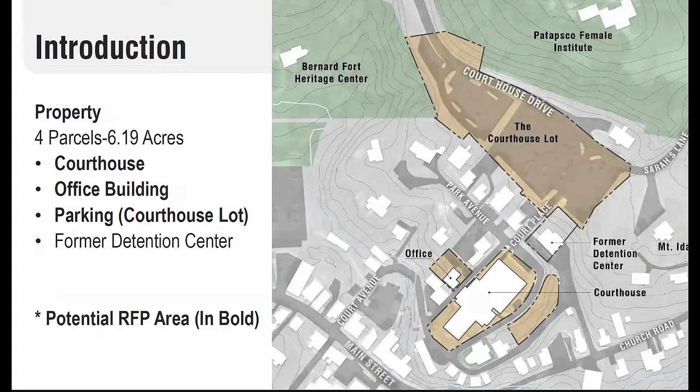The county goals and intent: redevelop the courthouse campus. The redevelopment should complement and enhance, but not compete with, existing businesses on Main Street. This is very important, not to create competition but rather support Main Street. Any redevelopment and reuse will be historically appropriate and follow the Ellicott City Historic District guidelines. Reuse of the property should, whenever possible, emphasize clear visual and physical connections to Main Street and increase foot traffic to the historic district.

The reuse should be sensitive to adjacent properties. At least some portion of the courthouse campus should be dedicated to community use if possible, and every effort should be made to leave adequate parking available for public use as part of the campus. Lastly, creative environmental site design practices should be utilized whenever possible, such as green roofs, green walls, and solar panels.

The schedule for this effort: as Zach mentioned, there was a request for information, RFI process, that occurred during March and April, and a planning board process that went from March into June. As part of that, there has been community input that brings us today, the public meeting on July 20th. We'll have an online survey in addition to the polling on this question, and that'll be open for two weeks. We'll talk a little more about that at the end of this meeting. September 1st is the zoning board hearing, and should this move forward to a request for proposals, or RFP process, that would occur in the winter of 2021 and 2022.

The courthouse building itself is comprised of four principal structures with multiple floor levels. Over the years, these buildings served many municipal functions, and there have been multiple renovations. You see here the 1843 original courthouse, the 1938 addition. They were then attached to the 1842 Oak Lawn residence that became part of the county courthouse. Then in 1988 was the latest addition. That 1988 addition reoriented the courthouse building so that the main entry is now to the parking lot side rather than at the original courthouse toward Main Street.

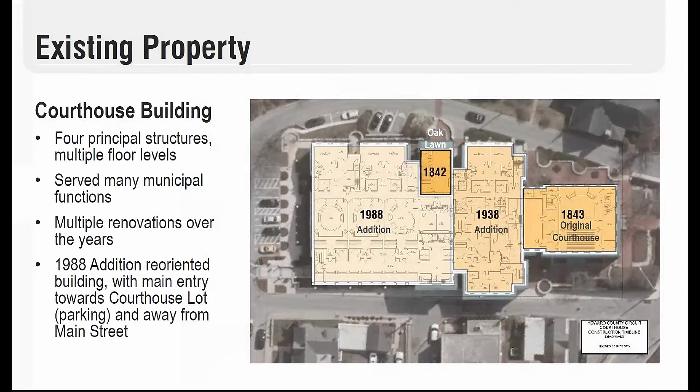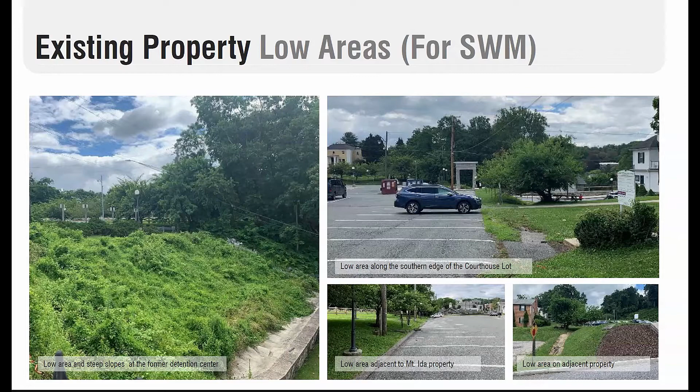View sheds, of course, include the views immediately from the courthouse building. We showed photographs from Park Avenue and from the front courtyard spaces looking out towards Main Street. We want to be sensitive to the Patapsco Female Institute, the views from the hillside up there, and also views as one approaches Mount Ida along Courthouse Drive. The views from the parking lot are dashed in because right now you're not up high enough to really enjoy them, but whatever happens with that parking lot may be able to take advantage of some of those broader views.

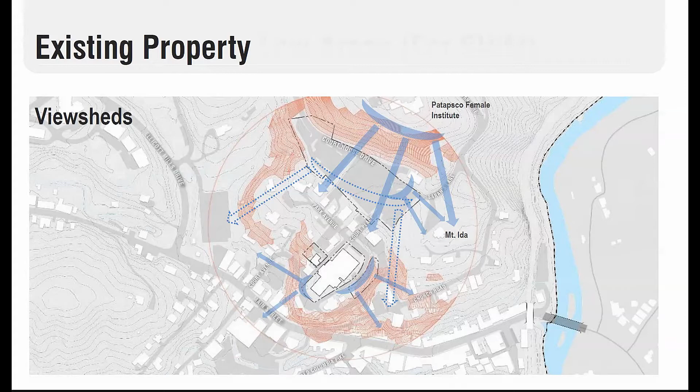From our work on the master plan, looking at the site from a planning perspective, we know there are some challenges. Adaptive reuse of the courthouse building is a challenge - it was designed solely as a courthouse, with a large floorplate, interior bearing walls, and limited exterior windows, which creates challenges with what uses you put in the building.

The topography between the property and Main Street presents access issues - vehicular and ADA accessible options to the courthouse are limited. Economic feasibility without an element of new construction is a challenge, which is something we heard from the RFI process Zach referenced earlier. And there's the public parking component in context of the broader Ellicott City parking resources and management - we can't look at this parking in a vacuum, it needs to be looked at holistically with all of Ellicott City.

We want to talk about the relevancy of the Ellicott City Watershed Master Plan. For those familiar with the process, in addition to geographic frameworks that talked about things like the courthouse specifically, we also had topic area frameworks dealing with community character and placemaking, flood mitigation, environmental stewardship, economic development, and transportation and parking. All of these frameworks interface with this courthouse reuse.

In addition to the overall topic-related frameworks, there are geographic frameworks, and the courthouse area is one of seven geographic frameworks. This shape encompasses more than just the courthouse property, because whatever happens there needs to take into consideration adjacencies like the Patapsco Female Institute, Mount Ida, and so forth.

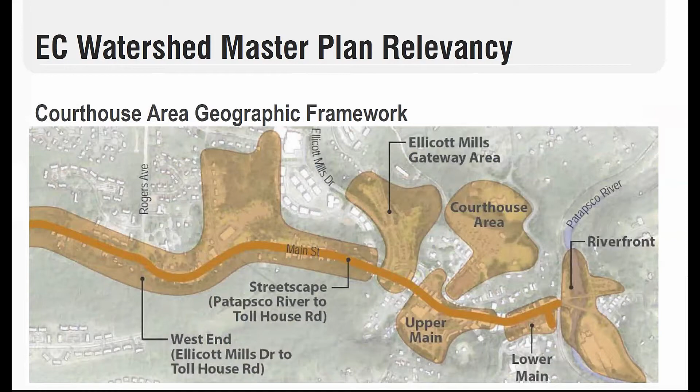A big recommendation of the Watershed Master Plan was the Green Cultural Trail, an opportunity to create a multi-tiered pedestrian experience throughout Ellicott City. In red, along the roadways and Main Street, is a more urban experience engaging with storefronts and active uses. In the green areas, a series of trails and pathways—some rustic footpaths through steep slopes and woods, others paved sidewalks and trails—linking heritage, cultural, and natural resources throughout the community. There's an opportunity to create a loop connecting the courthouse with the Bernard Fort Heritage Center, the Patapsco Female Institute, and Main Street.

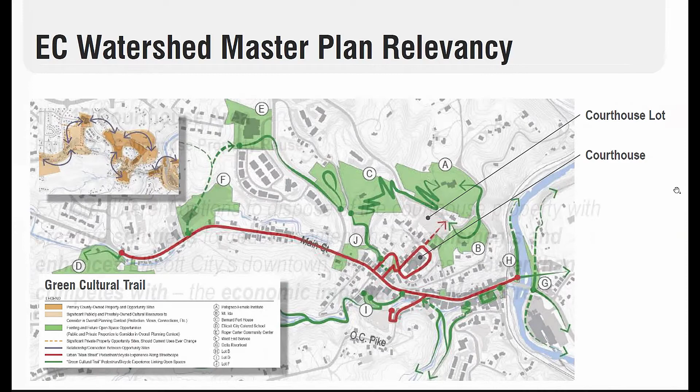In the master plan, where we specifically discuss the courthouse area, the policy recommendation is to explore different options to dispose of the property with creative solutions for redevelopment that complement and enhance Ellicott City's downtown, reinforcing rather than competing with the economic importance of Main Street. This repeats the county's goals for this effort.

Specific implementing actions are highlighted here. I won't read through all of these, but they include dealing with a sensitive interface to adjacent properties, a holistic master plan approach, creating an open space network connecting with other open spaces, view sheds, environmental site design, public art and interpretation, and looking at a brand identity for this area—does Courthouse Hill become a distinct area within Ellicott City with its own identity?

This presentation will be posted online after this meeting, so if you'd like a chance to look at these in more detail, you'll have that opportunity.

In the master plan, we also included framework plans addressing some issues, which we'll talk more about this evening—potential relationships, areas where stormwater makes the most sense, highlighted by the number H, critical street connections marked A, view sheds, and relationship to Mount Ida. Off to the right are examples of where stormwater might be incorporated into the parking lot, and how new construction on the site could be developed to either serve as a focal point or facilitate connections between the courthouse and the Patapsco Female Institute.

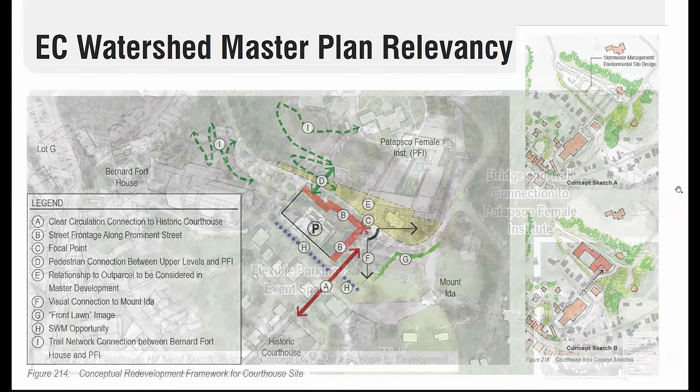The master plan included illustrations. I want to emphasize, as we did in the master plan, these are illustrative, showing conceptual ideas, but not prescribed recommendations for the site itself. This was just showing some potential for the site to use in the process for spurring interest in courthouse reuse.

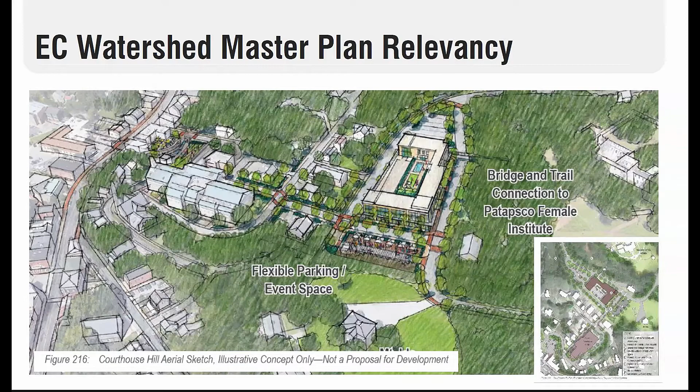So now we're going to get to some specific reuse opportunities for the site itself. We're really here tonight to hear from you in the polling and Q&A to get your input on this as well.

First, we're going to talk a little bit about the former detention center because it's integral to the site and the relationship to the parking lot and the former courthouse area. Some background: the detention center was completed in 1851 and used as a detention center into the early 1980s, continuing some use until recently. The interior has been substantially modified by several renovations. It sits down in a stream valley, a drainage valley, surrounded on three sides by slopes and stone rubble walls, which add to the character of the site.

So I'm going to turn this over to Nick Redding right now, and he'll, on the next slide, talk a little more about the relationship of Preservation Maryland and their role in the detention center.

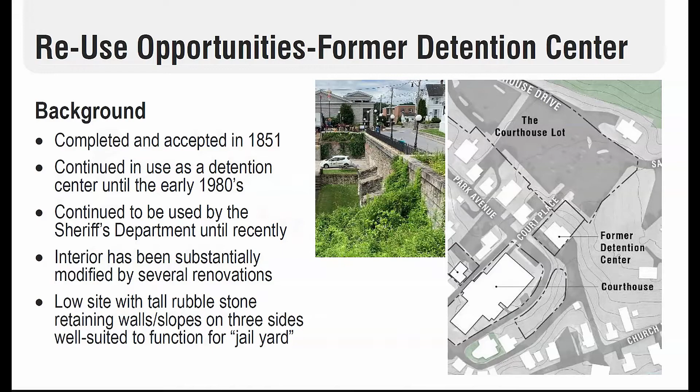Nick? Yeah, this is Nick. Can everyone hear me? Or can you hear me, Tom? A little quiet. We hear you. Oh, okay. Well, I can speak up a little bit.

This is Nick Redding, president and CEO of Preservation Maryland, thrilled to be part of this. We are moving forward with a partnership at this point with Howard County government to look at how this structure can be reused from a preservation-friendly and sensitive standpoint.

We have applied for funding from the Maryland Department of Housing and Community Development, with the support of Howard County government, to secure funding that would support the architecture, engineering, and planning associated with reuse of this building, and identifying uses through community input and outreach that meet the needs identified in this presentation, while also identifying ways to reuse this building from a financially sustainable standpoint.

So in whatever way that works out, we need to make sure that how it's programmed helps pay for the long-term upkeep and use of the structure. That is the long-term goal: identifying that, working with the preservation community and the broader Ellicott City community in that process.

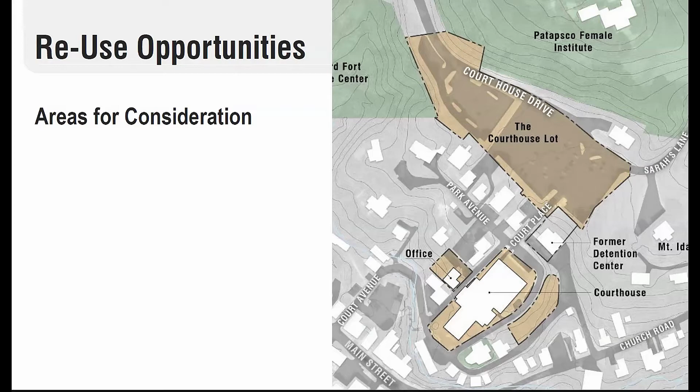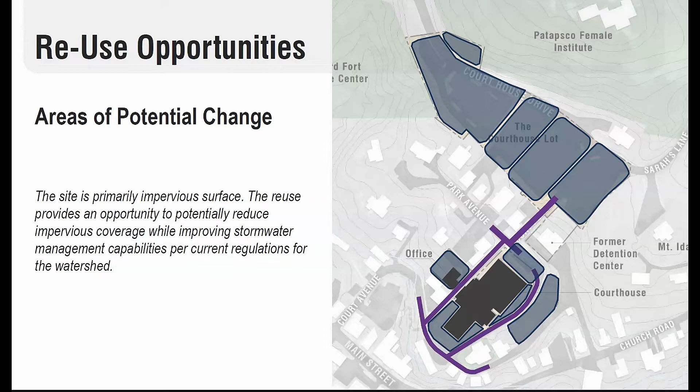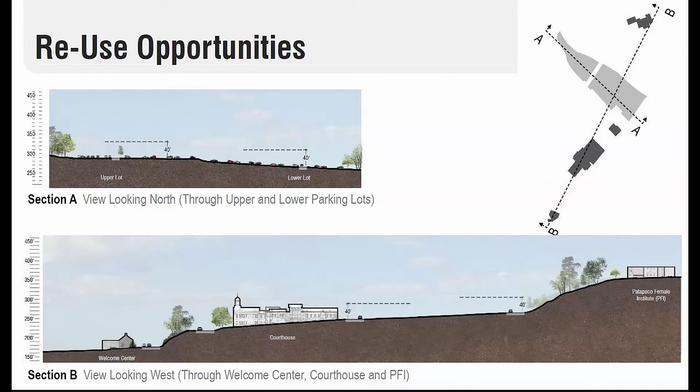Next slide. For reference, these are two cross sections. The top, section A, runs east-west through the upper and lower parking lots shown on the diagram to the right. Cross section B on the bottom goes from the Welcome Center on the left up to the Patapsco Female Institute, showing the relative grade change between Main Street, the courthouse, and the Patapsco Female Institute. The dashed line represents a 40-foot height, the current height limit in the zoning district.

Next slide. Some potential uses for the site, coming from both the master plan process and input from the request for information: accommodations, office, business incubator, mixed use, event and meeting space, cultural or civic uses, food-related uses such as a restaurant or food hall or specialty provisions, a public parking component, and public realm improvements such as improving the definition of streets, sidewalks, and bike infrastructure through the site, plus other potential uses. We'd love to hear from you all tonight on that. Next slide.

So we're going to talk about the reuse site components as it relates to these five components: the courthouse itself, the office building, the open space or flex space, parking, and the parking lot redevelopment area.

So as we look at all of these over the next series of slides, they all take into account these assumptions. One, the preservation of the historic portions of the courthouse building with the reuse. So the area that's blackened in, that's the original courthouse, the 1938 addition, and the Oak Lawn building. We're making the assumption those would be preserved with the reuse.

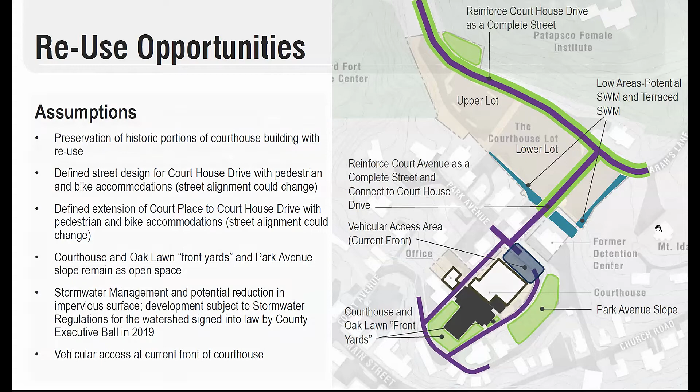So if we look at the courthouse, one option is that the courthouse building is reused in its entirety as a destination use, mixed use, or other destination use, or without a destination focus, where it might just be an office use or something that's not going to be an attractor of people, a specific use for a specific user group. The key here is it would be used in its entirety, including the 1988 non-historic portion of the building.

Another option is that the historic portions are reused, but the 1988 addition might have some selective editing. We're showing in this slide that maybe there's a courtyard opened up in the middle of the building, whether it's in the middle, a side that's opened up, or some wings created in some other way. The idea is that perhaps the building might be more usable or more adaptive for another use with this selective editing. That would really come out of the RFP processes if it goes to that point, looking for some creative solutions.

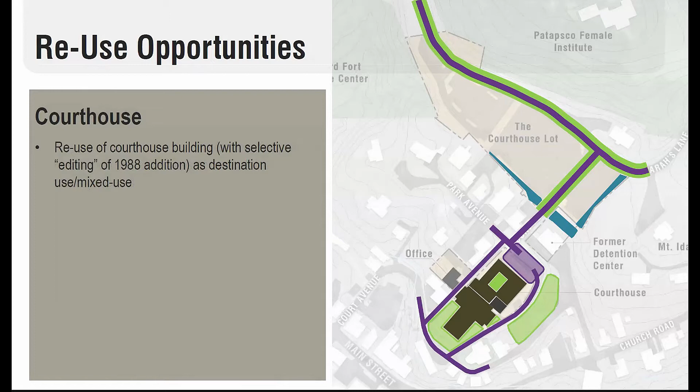As we look at the office building, one option is that the office building is reused for either office or some other use, the existing building that you see highlighted in black.

Since that building really doesn't contribute very well to the character of the area, another option might be that the office building is replaced with open space.

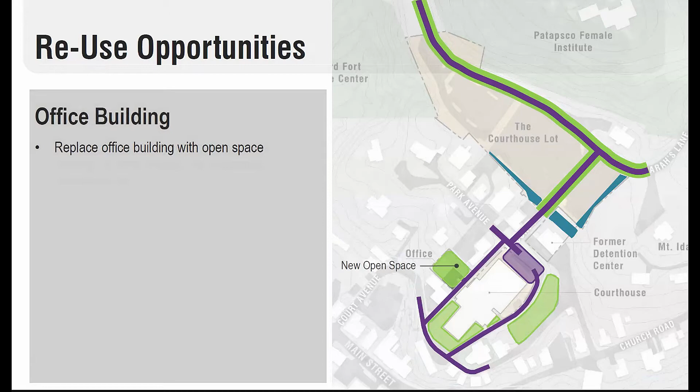As we talk about open space and what we'll call flex space, one option is to maximize the open space adjacent to the east facade of the courthouse along Park Avenue. Right now there's some reserve parking that was added in over the years, so one option is that reserve parking is removed and that becomes open space. That might depend on whatever the use of the building is. There could be outdoor terrace space that takes advantage of those views across Park Avenue, or something that supports the adjacent use in the 1988 portion of the building.

Another option for open space is that if significant open space is introduced into the site, one logical area for that to occur would be on the portion of the parking lot closest to Mount Ida. It'd be along the street connection, have some street public frontage.

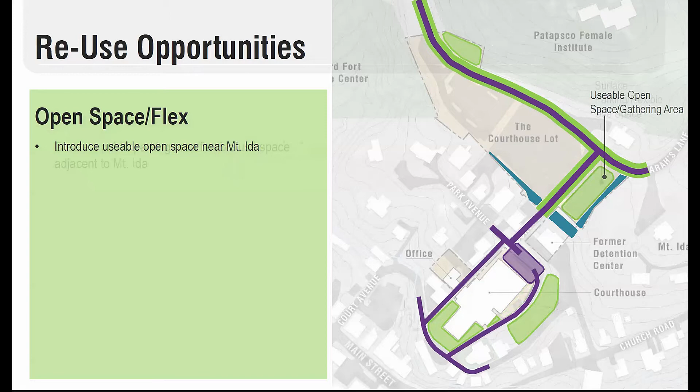But then also serve as a forecourt to Mount Ida and help preserve a view corridor coming from Courthouse Drive. Another option for that space is that it could be a flex space, flex open space, or flex parking—a concept we talked a lot about in the master plan. For other parking lots, there's some flexible use, and that was a concept we talked about for this property as well, that it functions as a parking lot most of the time, but it's designed so it could also function as a gathering space or active amenity space other times, during events or festivals, or weekly for markets or something like that.

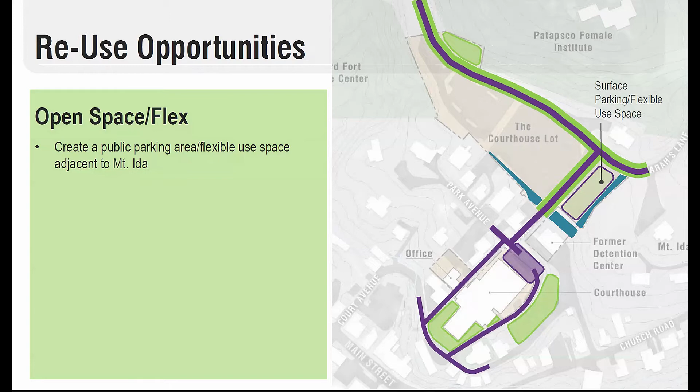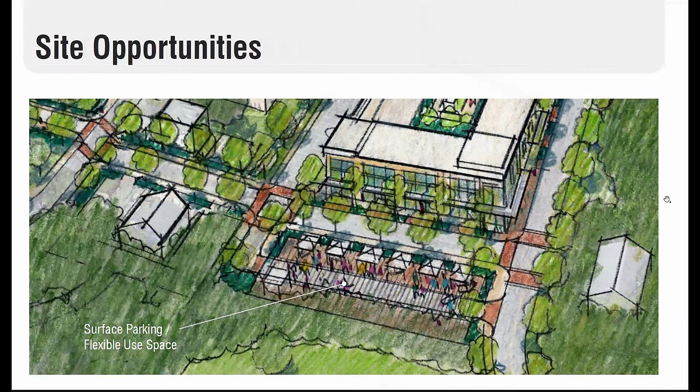As we talk about the parking lot, we've combined these two components, parking and potential new construction, because they really go hand in hand. The parking lot is the area where new construction would likely occur if any. This concept shows that a portion of the lower parking lot remains as surface parking, but the western portion of the lower lot and the upper lot could be an area for new construction, which would preserve most of the view shed from the Patapsco Female Institute looking down toward the courthouse.

Another option is that there's less of a component of new construction, restricted only to the upper lot, and then the entire lower lot remains as surface parking.

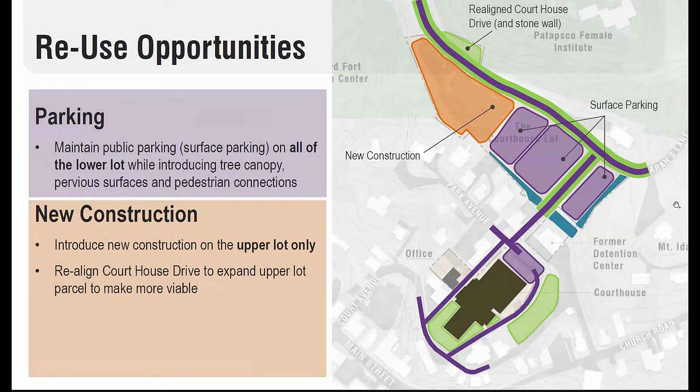Or, flipping that as an option, the upper lot remains surface parking and new construction could occur on the lower lot.

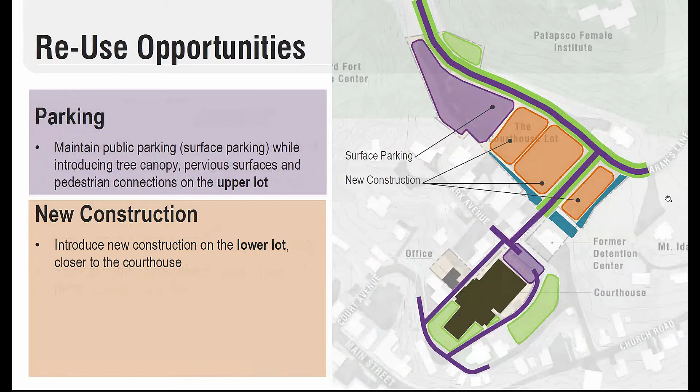And then the other area of parking—we talked earlier about the area in front of Park Avenue, in front of the 1988 addition—depending again on the use of the courthouse, maybe we maintain those parking spaces off of Park Avenue to help that use function better with more direct access to the roadway.

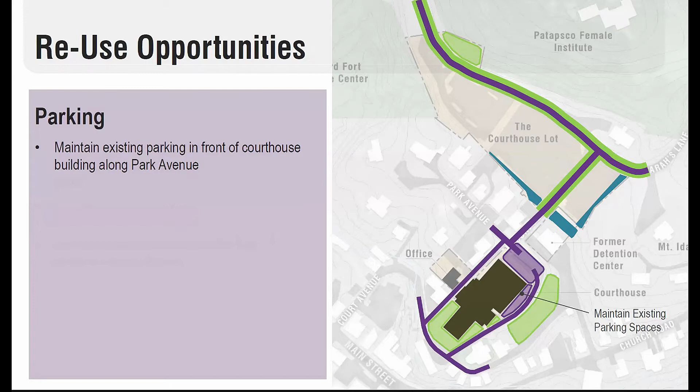So these components are much like everything in Ellicott City—everything is interrelated, and these components would be related. Whatever approach to reuse is taken, there could be a combination of any elements. The examples we showed are just a few; they could be mixed and matched. You could have combinations of what we showed, or a different combination than what we showed. But they're interrelated, and again it depends on the reuse of the buildings and then the relationships of those other uses to the buildings.